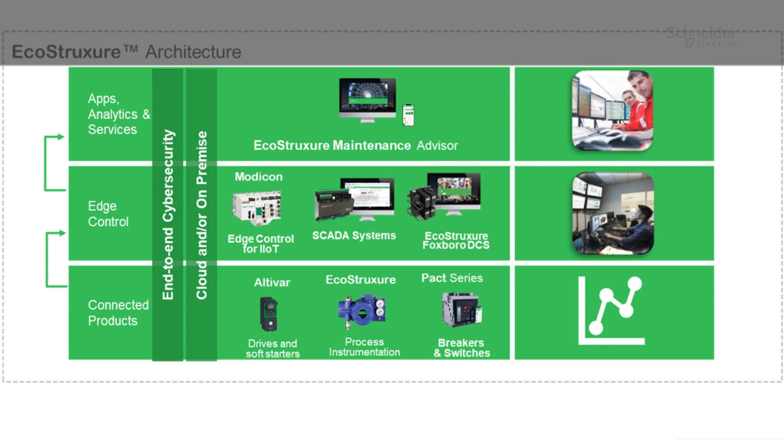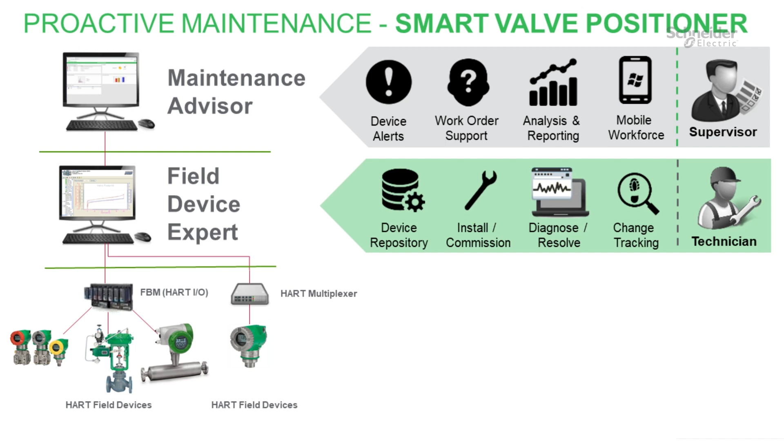We will now demonstrate proactive maintenance for valves, using at the bottom layer smart valve positioners, the connected products. These are connected to the edge where we will be using Field Device Expert to diagnose the valve. And in the apps and analytical layer, Maintenance Advisor will give us the device alerts.

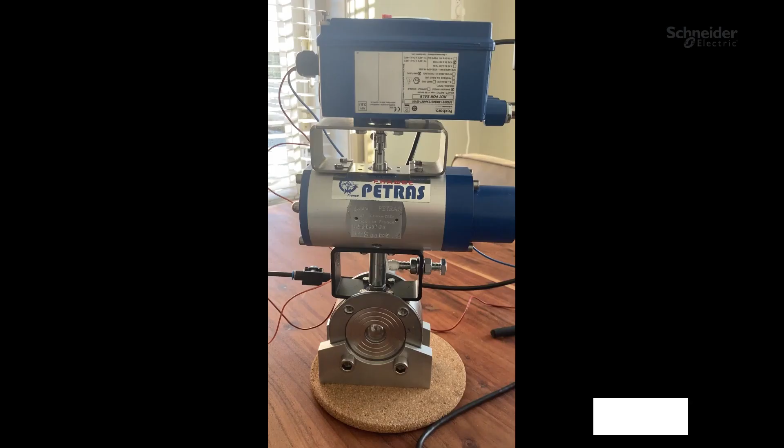So from top to bottom, we will get a device alert that there is friction in the valve. Then we can go to Field Device Expert to diagnose the cause of this friction. These causes of the failure modes can be, for instance, air condition, the tuning of the valve, or mechanical issues, with the end effect of possible unsafe operations. We will demonstrate proactive maintenance using this setup.

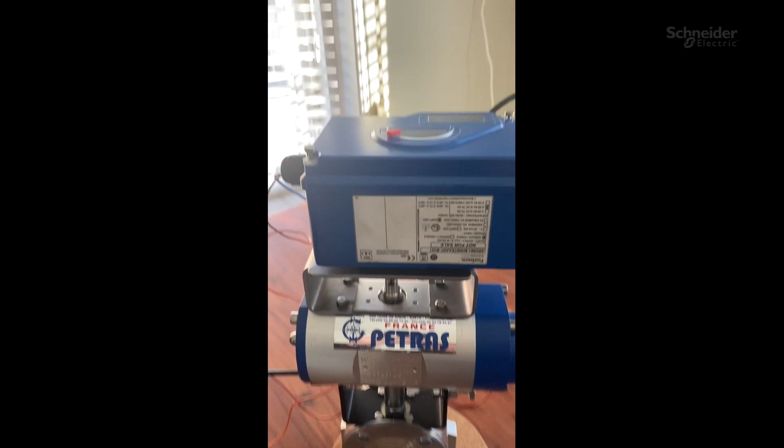At the top, you will find a smart valve positioner. This is the Schneider Electric SRD991, which is mounted on top of a spring to close actuator, which actuates a ball valve. First, let's have a look in Maintenance Advisor. Here we can see that there are no outstanding conditions for this valve.

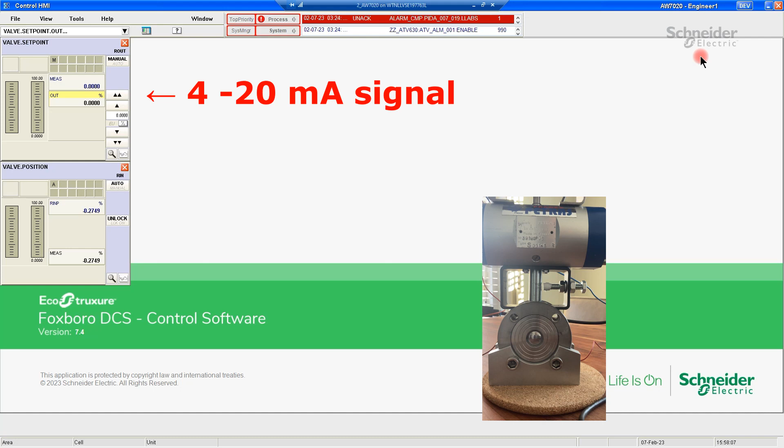In this screen, we can actually see how we can operate the valve. At the top faceplate, we can open the valve from between 0 and 100%. At the bottom faceplate, we can then see the feedback position of the valve. We are now going to open the valve by changing the valve set point to 75%. If you look to the in-picture video of the valve, you can see the ball valve opening.

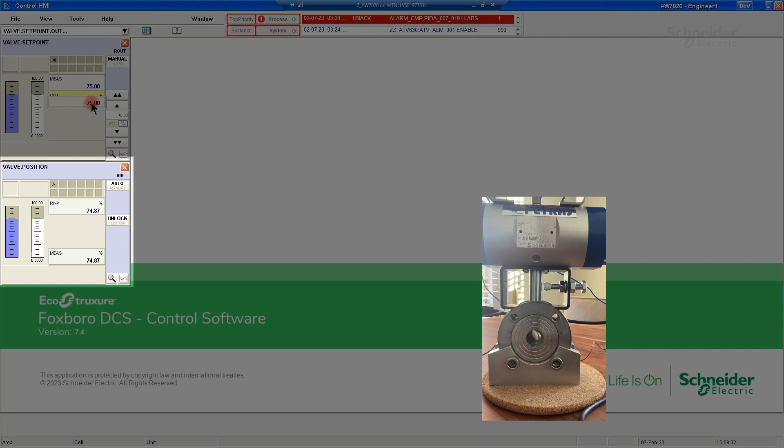If we now look at the valve feedback signal, we can see that the valve position is near the 75% as expected. Logically, this didn't create any conditions in Maintenance Advisor. We will now close the valve again, so 0%, because we are going to create additional friction. We will do this by tightening this bolt against the valve stem. Well, let me show you how.

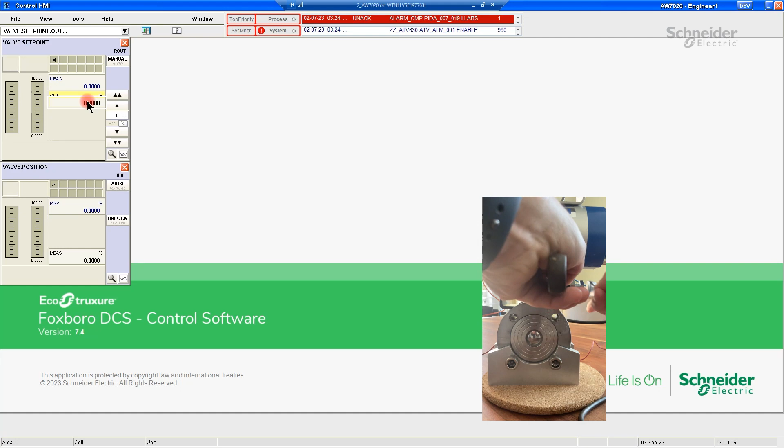And now I'm grabbing some tools to make it really nice and tight, so we can see the additional friction load on the valve movement. The valve is now ready to go. Let's open the valve and repeat our action by changing the set point to 75%.

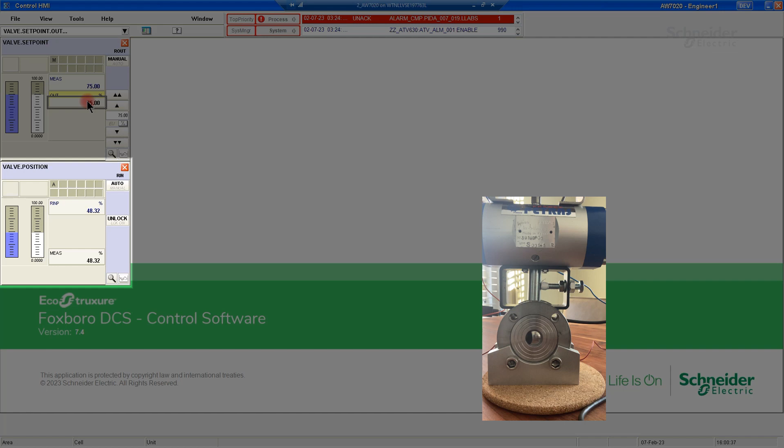If we now look closely to the valve, we can see that the ball is not open at 75%. And if we look to the valve feedback position, it's only at 48%. If we now look at Maintenance Advisor, we can see that we actually got an alarm on this valve. It's saying that there's a deviation between the set point and the actual position of the valve.

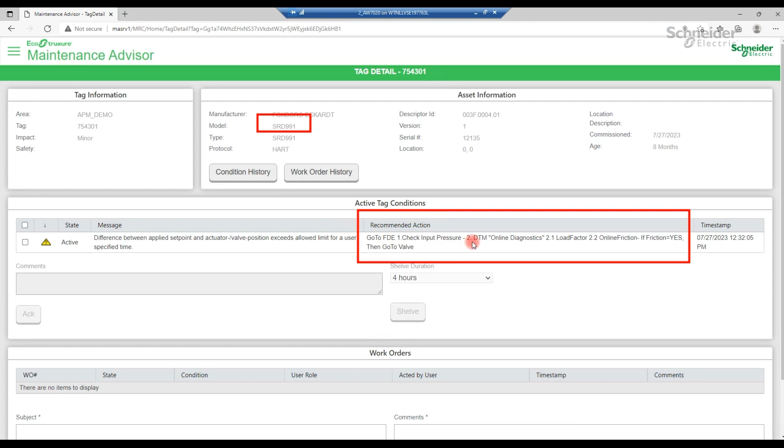When we go into the detail screen of this valve, we can get more information. For instance, asset information. Here we can see that we are looking at a SRD991. Secondly, we will get a recommended action. Here it's telling us to go to FDE, Field Device Expert, check the input pressure, or go to the online diagnostics and check the load factor, or the online friction. And if there's friction, go to the valve and solve it.

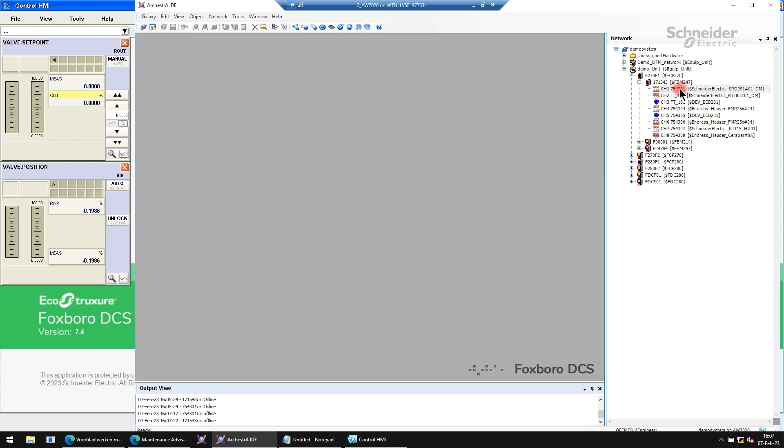As recommended in Maintenance Advisor, we should look into Field Device Expert. We knew that we should look at this specific tag. When we open Field Device Expert, we can go online. As soon as we are online, we immediately get a first impression on the state of the valve.

But as mentioned in the recommended action, we should look at the air supply to see if it's in a good state. The air supply is okay, so this is not the cause of the control deviation. The yellow color indicates that there is an off specification, which is logical because we have seen that there is a control deviation. As mentioned, if it's not the air supply, we should look at friction indication.

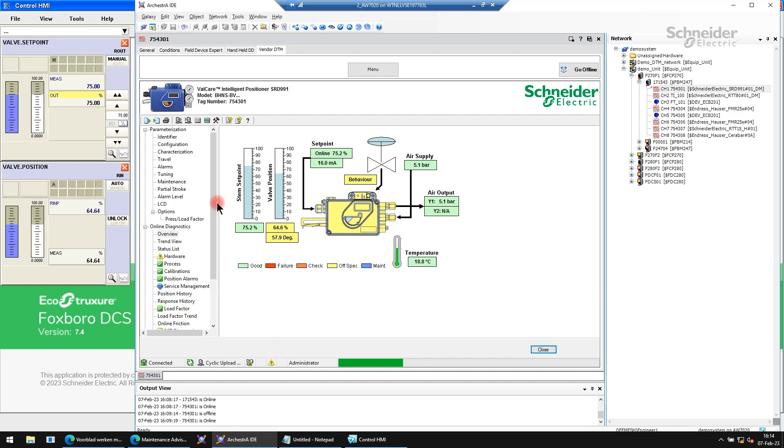I have now opened the tool Online Friction. And in the online friction, we can see two things, red dots and a blue line. The blue line is the spring characteristics. It's defined during the auto start. It tells us the pressure required for 100% opening of the valve and 0% opening and anything in between. These red markers are live values. It's the pressure at the current position.

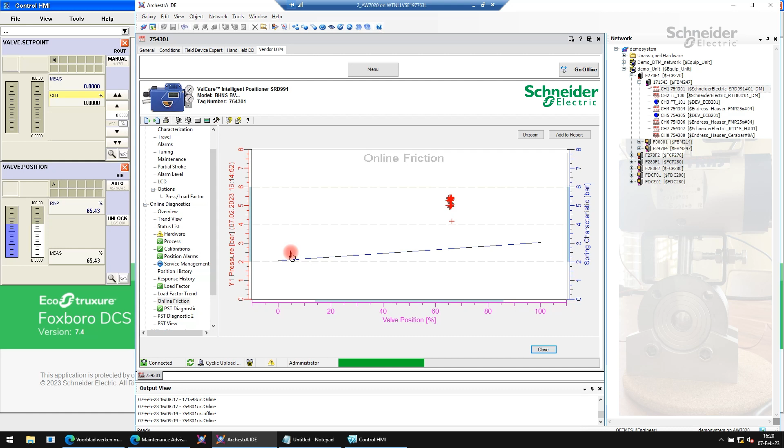As we can see on the left, the current position is 65%, which is the same as we can see on the horizontal axis. However, it's using 5 bars to get to 65%, where we would expect something like 2.5 bars. So this online friction is an ideal tool to see the difference between the theoretical pressure and the actual pressure. And this is then a clear indication that there's either an obstruction in the valve or there's a heavy friction load. I have now closed the valve because I'm going to resolve the friction.

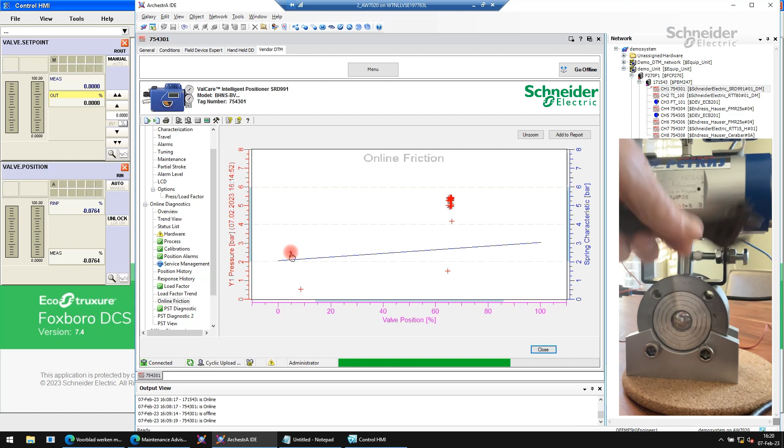Grabbing my tools and relieving the bolt from the stem to relieve the friction. The valve again has free movement. Let's repeat our exercise. Let's open the valve at 75% as we did earlier. Looking at the video of the valve, we can see it now opened.

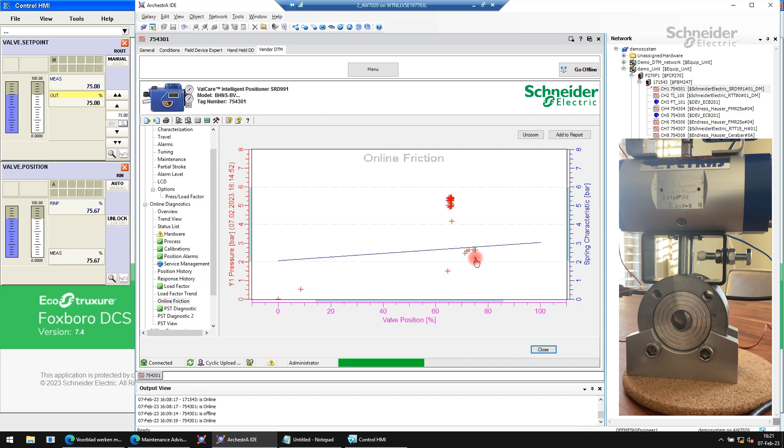If we now look at the feedback signal in the valve position, we can see that it is gradually moving towards this 75%. In that way, a typical behavior that you expect from a healthy valve. We can now use the online friction tool again to verify that the valve is in a healthy state. And as you can see, the red markers are where they should be, next to the blue line.

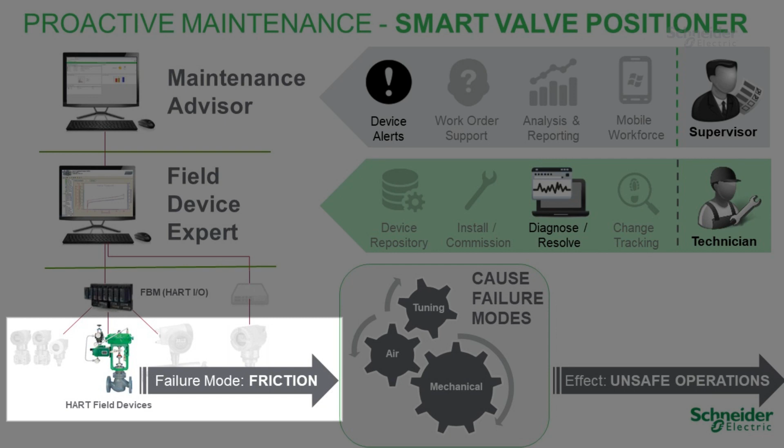And there you have it. We have done proactive maintenance on a valve. We had the failure mode friction. We found the cause of the failure mode, which was mechanical, and we prevented unsafe operations.